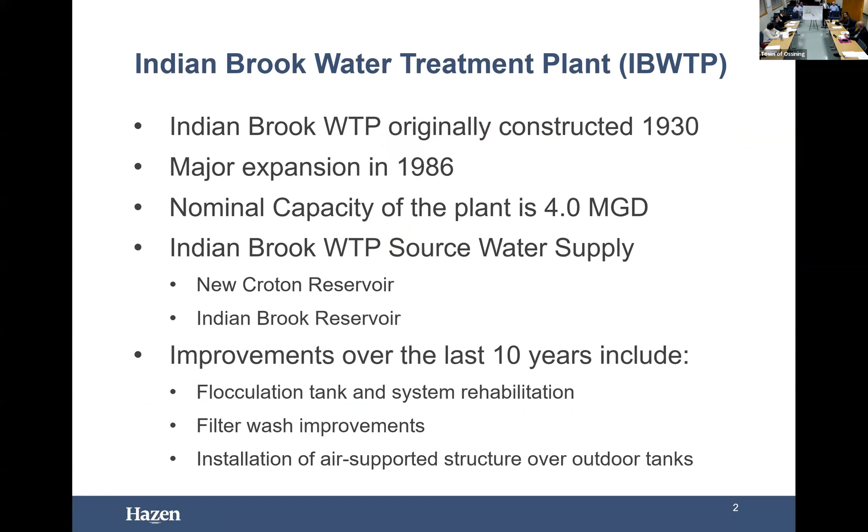I'm zooming in. That's great. Amazing. Okay, so from the top, this is what we're speaking about. Incredible. Very nice. Can I say anything? Yes.

Water Superintendent David Tees. Just to bring everybody back up to speed on the water quality issues, you can remember a couple of years ago we had MIB in the water. That was from decaying algae from the New York City water source. Hundreds of calls came in, it was on the news. We had to address it fast. We instituted a powdered activated carbon system that would remove the taste and odor issues from the MIB.

We knew it wouldn't be sustainable because in the future, we never know if New York City would be sending us this MIB, and it would be short-sighted not to make these changes to the plant. So the silver lining is, could you imagine putting a $30 or $40 million plant online without handling MIB, and all of a sudden we have those taste and odor issues?

So it was a blessing in disguise, but when Ruby had talked about the powder activated carbon and the AOP system, the way to destroy MIB, say if the concentrations come in at 150 parts per trillion, we want to use the UV, which we had. It was a huge increase, not money-wise, but because it's like 4 times the size of what's required for disinfection.

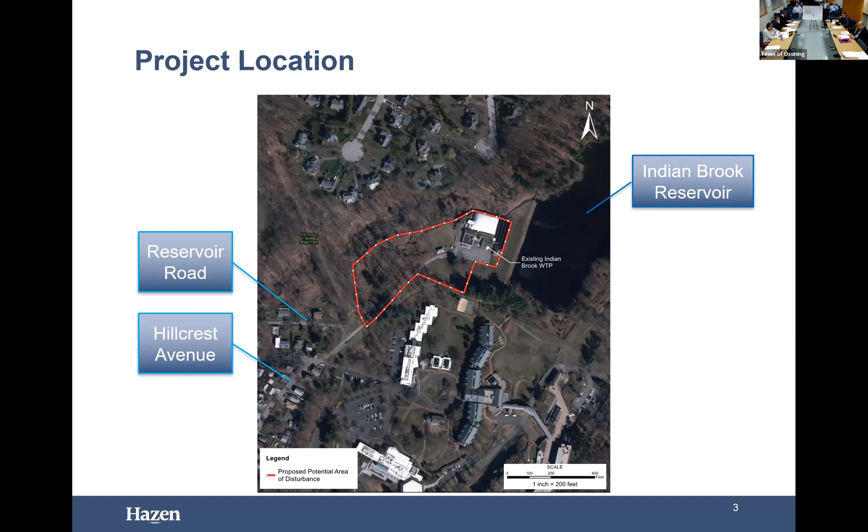See, the existing plant is the top right corner, and then the new plant will be in the middle area, just off some roads. Yeah, this is what we just talked about. And then this is just a simplified block diagram of the treatment train, if anything comes up, but again, we want to focus on the new components. Sure.

So obviously this is the new design. When you see the rapid mix, that's where the chemicals are added, including the powder activated carbon and polyaluminum chloride. Flocculation is a little bit different. We still try and grab the dirt and make the particle into a larger particle, so it can be removed in two ways. The existing plant is through sedimentation, right? We switched this to dissolved air flotation.

So these micron bubbles that we're going to be putting in this tank allow the footprint to be much smaller in this plant, and it's so much more efficient. So instead of the sludge like in the existing plant, where it would settle and you'd sweep the sludge off the bottom, which would be any organics, leaves, turbidity, and chemicals, we're floating that with micron bubbles and then we scrape it off the top.

It's amazing. Actually, the first plant in the United States was instituted at the Millwood Water Treatment Plant, 2 miles from here. And then the dual media filtration, which is anthracite and sand, and then the advanced UV system. So this is with the hydrogen peroxide that will destroy the MIB. Not only will it destroy MIB, Giardia, Cryptosporidium, it will allow us to lower our chlorine residual in the system that sometimes residents taste and smell.

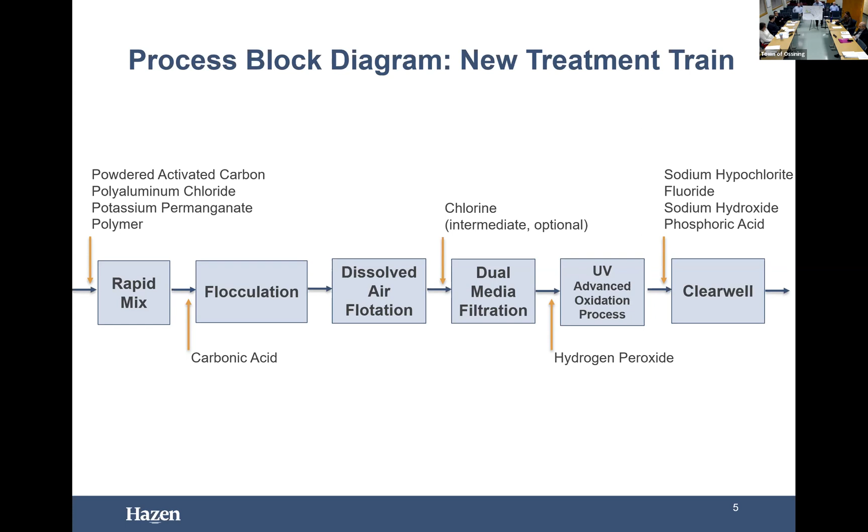So this slide is just summarizing the fact that there is no change in the design capacity of the amended plan. Sorry, I just want to clarify. I keep toggling between terms. When I say original design or original plan, I'm referring to the 2018 design that didn't have the additional processes. And the amended design is the complete final project with the amendments. And when I say existing, that's the thing that's here today. Sorry for the confusion.

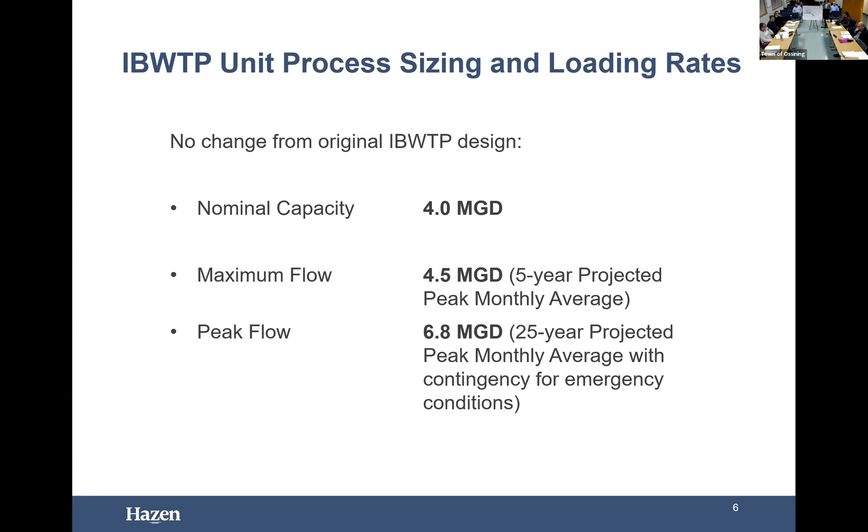So no change between original design and amended design for nominal capacity, 4 MGD, maximum flow, 4.5 MGD, and peak flow, 6.8. So that's the same. And I know this is a little hard to see, maybe it's easier in your packet, but this is highlighting the additional processes or the additional footprint of the amended design. Starting from the right, you'll see the red circle, that's the new hydrogen peroxide building. The approximate dimensions are about 12 feet by 23 feet, so about 276 square feet.

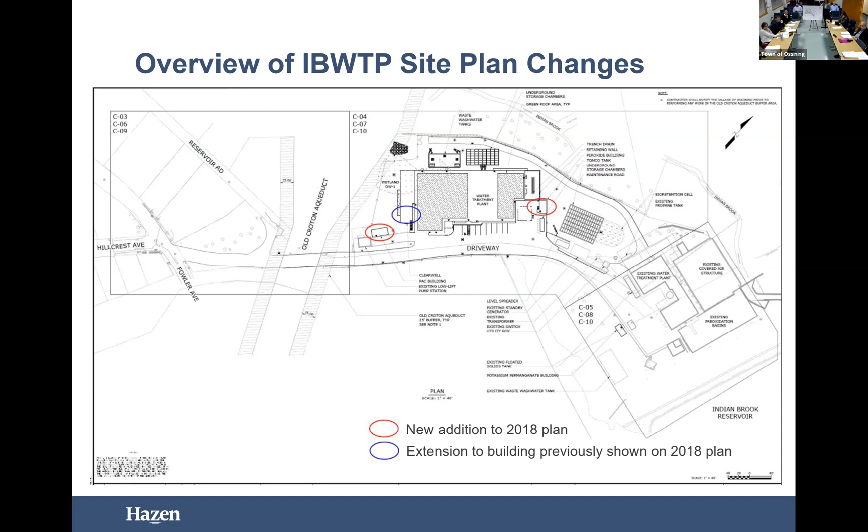And then the blue circle you see in the middle of the main building is the extension of the facility, about 40 feet, to allow for the amended UV system. That area is 40 feet by 23, which is about 920 square feet. And then to the left, the red circle is the new PAC. That's going to be approximately 30 feet by 15 feet. Let's go to the next slide. This is the same site plan, just without the circles. I know it's hard to see here, but I wanted to flag for you.

I wanted to flag for you the impacts to the wetland: there's no additional encroachment on the wetland. With all the colors, the wetland boundary is in pink, it's about 6,000 square feet. And the extension for the amended UV system is here, away from the wetland. You can see that a little better on this figure than the previous figure. Unless there's any questions, there's a couple more drawings to go.

Is that the wetland or the wetland buffer? I believe that is the wetland that we're showing, but I don't believe there's any work within the buffer either. From the overall project perhaps there's some impact to the wetland, but nothing new from the amendment, because it's away from that area. So the extension's not coming into the wetland buffer? The impacted area is not changed. The extension of the building is already in what was the impacted area. Okay, awesome. Thank you. Great question.

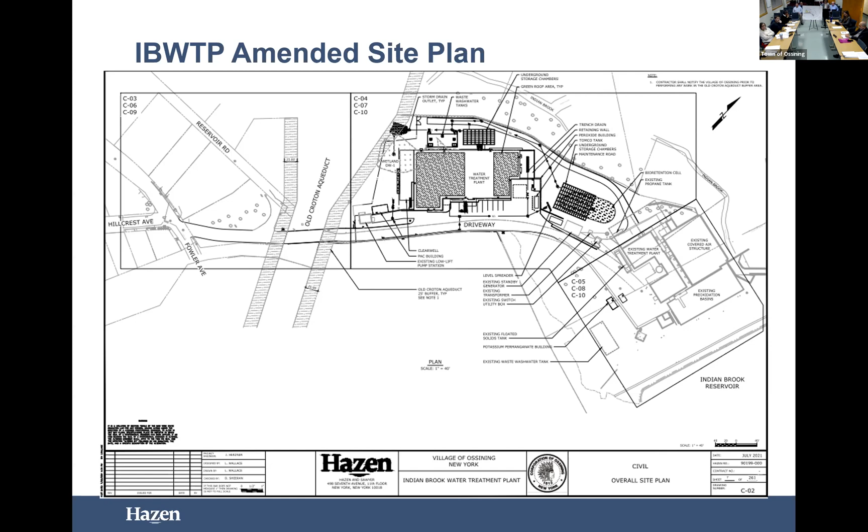Next slide. We can always come back if any other questions come up. I'll go through this very quickly. This is just showing the access, the driveway to the plant. This is off to the west, over here, and no change here. I wanted to show you the complete drawing set just for completeness. No change here from the original design. And then the next slide.

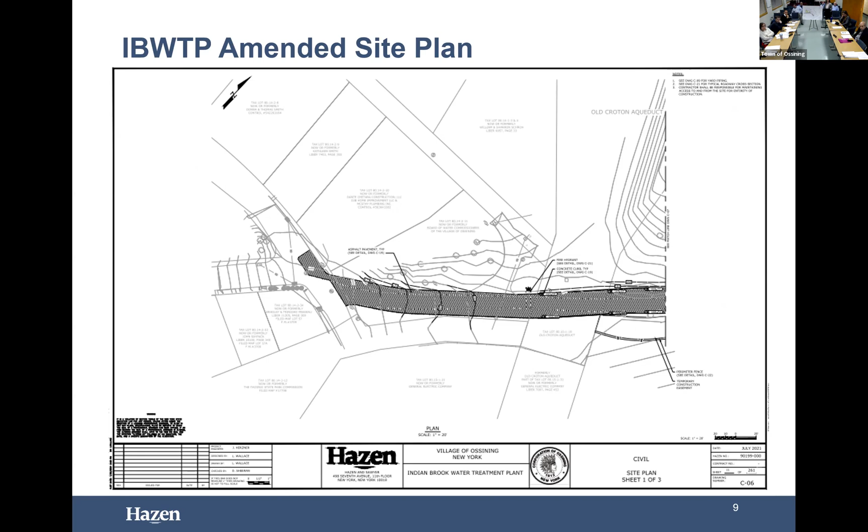Again, it's very busy and hard to see, but in case we wanted to get into any detail, this is the full design showing the bioretention area to the right. That large oval is the bioretention area. This is from the original design, nothing new there. The main treatment plant, and then all of the additional buildings. So it's just the full set.

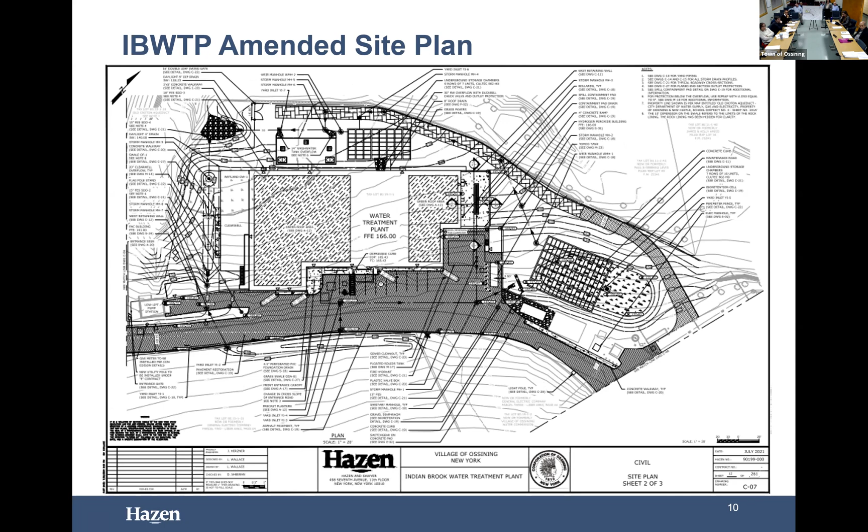Questions on that? Okay, and so permitting status, this is obviously critical. As I think we've mentioned, Westchester County DOH has approved the design. Now, they approved the original design back in November 2021. And then about a year later, they approved the amended design.

And really, obviously, that was the critical approval that we needed in order to continue the remaining permitting efforts, which I'll go over in the next couple slides. I did want to quickly note that the amended design did not trigger the need for any new or revised permits that we'd already received, because it's all within the footprint of the existing disturbance area. Trees are coming out, that sort of thing. Go for that on the next slide.

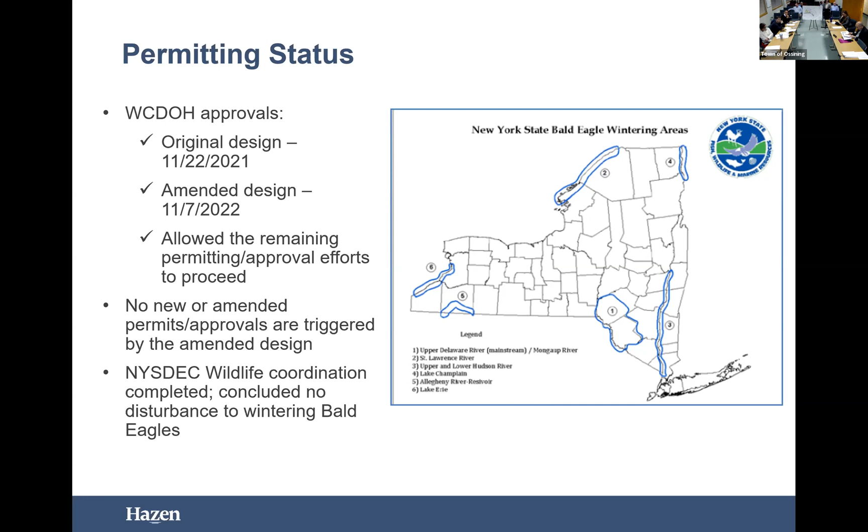And I also wanted to flag quickly, Mike, that on this slide, this big map here is just showing. I'm very proud of this. It took a lot of time to go back and forth with New York State DEC on the wintering bald eagle habitat. They were arguing that the project could affect wintering bald eagles along the Hudson. And after a lot of back and forth with them, we were able to convince them that the project will have zero effect. So that is done.

Okay, so going into the status of the remaining permits that we'll need. So I've grouped these into two sets, the construction permits and what I'm calling an operational permit. So the construction permits, all three of these are anticipated to be approved by June 2023. There's always some wiggle room there. Of course, things can take a little bit longer during the pandemic, but our recent experience is that this is a very reasonable and anticipated timeframe.

So the first permit I have listed here is the PCN, the pre-construction notification, and this is through U.S. Army Corps of Engineers. We have it all packaged up, ready to go, and so that will be going out likely this week. And that's essentially the main thing the Army Corps cares about, the wetland impacts. And again, those are not changing. We just needed to hold this application until we knew that there are no additional impacts to wetlands, and there are not. So we're sending this to Army Corps this week, expecting no issues there.

Same thing with the SWPPP. We have that all packaged up and ready to go, now that we know the stormwater disturbance and all of those things, and the town was able to find that a few weeks ago. And then the third permit I have listed there is the SPDES permit. We actually submitted that to DEC back in December. We got their comments back already. We're addressing those, and they're fairly straightforward. So again, we anticipate that being issued in a timely fashion.

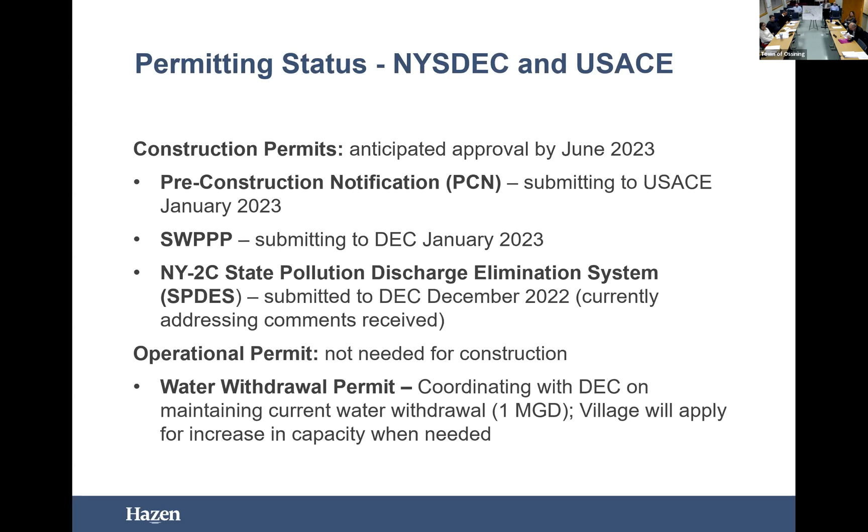Any questions on these permits before we move on to a summary of where we are with town? So, sure, many of you are wondering how the amendment impacts SEQRA. The good news is that it does not. Just recall that the neg dec was issued back in September 2018, and it was then amended in 2019 to address DEC comments and to do a coordinated review. And again, this amended design doesn't alter or introduce any impacts. There's minimal additional disturbance, and as we'll talk about in a second, no additional impacts to wetlands or anything of that nature. So luckily, we're good with SEQRA.

Tree removal permit was adopted by the town December 2018. Same thing, the amended design will not result in additional tree removal. The architectural resolution was adopted the same day, back in 2018. And the amended design is consistent with and in accordance with the original architectural design resolution. Finally, last but not least, we have the wetlands. The conceptual wetland mitigation design was shared with the town back in November 2022. As Jan will speak to for a minute, the final design is being completed based on discussions with the town and USACE mitigation requirements. That's all I have for today.

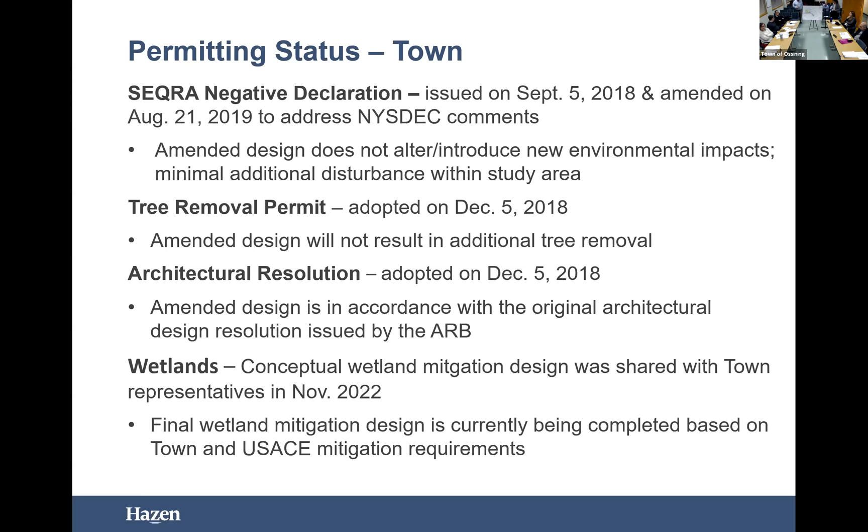So the wetland on the property, a 6,000 square foot hillside seep that presently is within the site. It's the pink area behind the building that will be impacted. It's an unavoidable impact. That impact occurred with the original approvals. What had not occurred with the original approval was the mitigation; the SEQRA neg dec and the resolution indicated that was to be prepared at a later date.

So our office was tasked to prepare a wetland mitigation plan, and it really involves two different phases. On this sheet, adjacent to the building itself, provision of the green roof, and those are the green boxes on the top of the building. They add up to just over 12,000 square feet. Green area in the corner there, that's going to be a planting area, restoration. There are other environmental benefits occurring in this program that we're not counting as mitigation, such as stormwater filtration systems, the bioretention systems. The walkway in the back is a permeable walkway. We just did not count it as wetland mitigation because they're required.

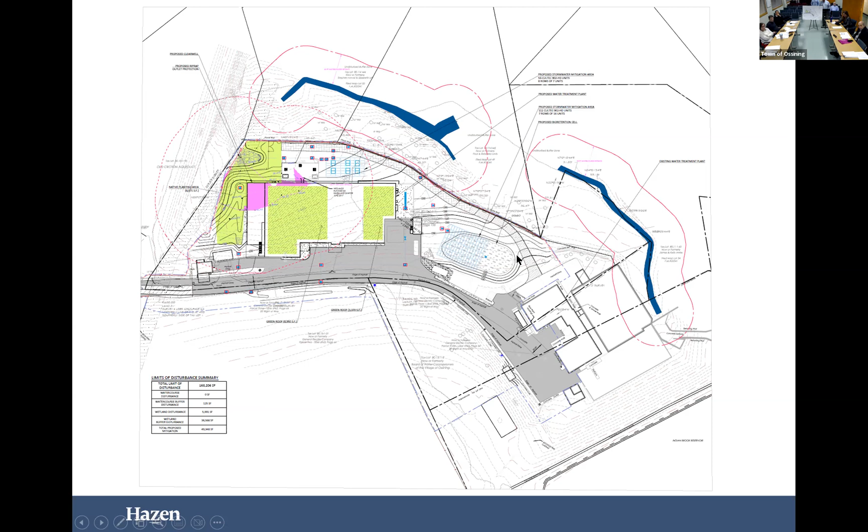I'm actually going to turn this around because this is basically the same slide with a little bit of updated information. So the neg dec spoke to a goal of replacing 6,000 square feet of lost wetland. So that's occurring up here closer to the reservoir. The area in blue on either side of the dam, all the areas that are shaded right here consist of maintained lawn. Along the shoreline, along the blue areas, is all phragmites. The goal here is to remove the phragmites in the blue area, and then regrade that portion so the blue area sits about 8 inches below the water line, create a bit of a shelf there, and plant it with emergent vegetation. So the blue areas are the wetland mitigation areas, and they total just over 6,000 square feet, 6,500 square feet. So that's the wetland replacement.

It's a second bonus of removing the invasives that are there. We have not developed a specific planting plan, so that's the general concept. The green areas, the one on the right there, again, maintained lawn. There'll be a transition zone. We'll plant that out with native trees, shrubs, and perennials. We'll seed it with a native seed mix and just let that grow fallow and become an extension of the wood line. Okay, and I'm sorry, in the report, it stated that you were going to remove invasive species. Yeah, the shoreline along the blue area is inundated with phragmites. So that's the invasive species removal, and then we're extending that shoreline into the property a little bit.

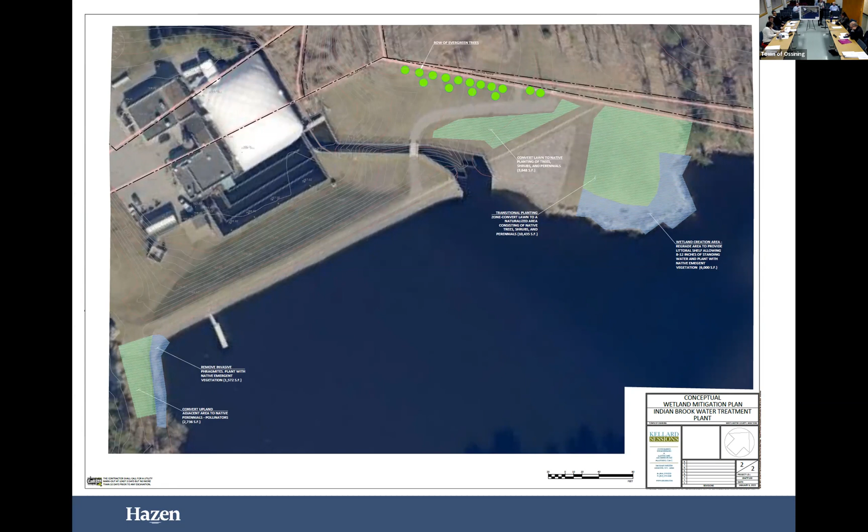The last slide I have. That was a lot, I know we covered a lot of questions. Anything else to bring up? Ask if there's anybody in the audience that would like to comment on this project. I see that there's 2 people in the attendees. You could raise your virtual hand. Can the attendees hear us? We could hear you, Sandy. Okay. No comment, okay. Members of the board have more questions?